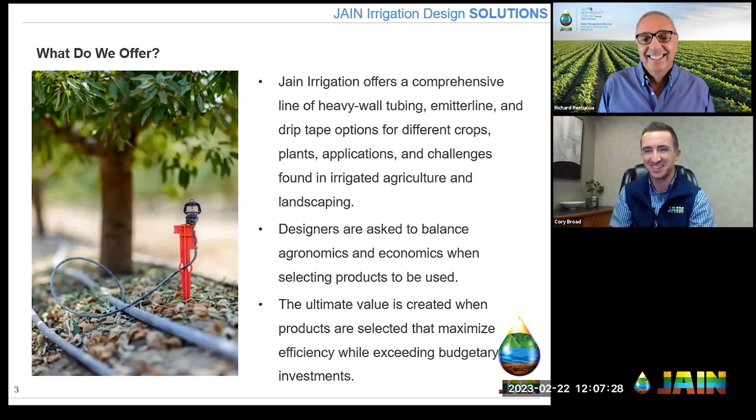And then there's an exponent, and then another variable, and then a fraction, and it gets really complicated. But no, you are certainly spot on, and not the only one.

And so, kind of to what I was just saying, this is just a screenshot I pulled from the catalog. This is just our heavy wall tubing section in our catalog. Again, I talked about having this robust, comprehensive line of irrigation tubing, or what we would call supply tubing. There's a lot of different things to unpack here. And it could be overwhelming if you're not sure what you're looking at, or what might be the best fit for what you're trying to do. We don't need to focus too much on the details of it, but I just wanted to put it out there that, hey, this is what we have to face every day. So you have a lot of different choices here.

Obviously in agriculture, we have most of what we do down to really 3 common sizes, which are nominally referred to as 1/2 inch, 5/8, and 3/4. But if you're on the technical side of it, it's 620 by 710, 720 by 820, and 830 by 940. There are going to be smaller and larger versions outside of those specs, but it really comes down to, for example, if you're using a pressure compensating emission device, say a Click Tif button dripper, you might be able to use smaller supply tubing, smaller lateral tubing, in order to save money, because that device is putting out the same amount of water across a wide pressure range. And we'll talk about that more in a moment.

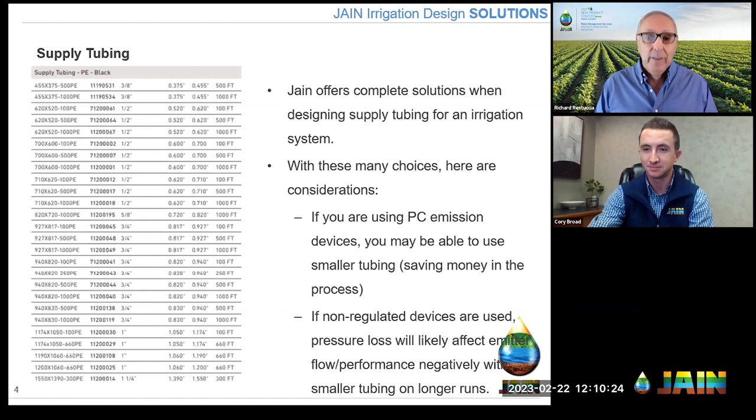Absolutely. And so just to break down what we were just talking about graphically, I've taken this from a number of presentations in the past, and what we're illustrating here is uniformity versus pressure. So if you had a non-regulated device, say a Jain Jet, or even a non-regulated dripper, you see on the left-hand side the pipe segment, and then it feeds down the row to the right-hand side. And in this example, all the way down the lateral, it's basically 16 pounds of pressure.

Therefore, you have that nice uniform blue box of water, if you will. Every plant is well watered, it's pretty easy to manage, and we know how deep it's going to go. Everything's good. Now, in an example where you had what we would define as excessive pressure loss, you started with 16, and instead of ending with 16, you're now ending with 6.5, so roughly 10 pounds of pressure loss. You see that the front plants are pretty well irrigated to about a third of the way.

Then those plants in the middle are kind of like, I'm not totally happy. And then probably the last few plants are not looking too hot, right? And it doesn't matter if it's a rose bush or an almond tree, they're not getting what they need. Especially from the ag side where we do fertigation, they're not getting the nutrients they need. It's an exponential compounding effect.

That's just an illustration of what happens when you have too much pressure loss in a line. That could be because we used too small of a tubing to meet the flow demand, or we just ran the tubing too far and didn't have manageable run lengths. And the example I got handed yesterday was, hey, I need your expertise, I have a question. And I said, okay. They said, I have a grower that has 8-gallon-an-hour sprinklers, spaced at, say, 15 feet apart, and they want to know how far they can run that.

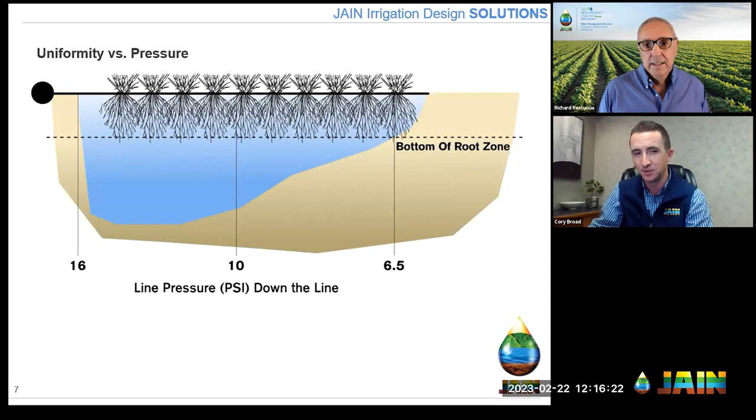And so that, again, is just a gross example of, well, now I have to over irrigate. Well, then that might throw off the nutrient balance on the front end of the orchard. And so there's just all of these things that go into play. So let's try and get to the first example where everything's really even and really nice. And again, work with the right products out of the gate.

So getting into a real life example, things that I see out in the field. This is a flow chart from one of our JainJet catalogs. And so I chose a number 35 orange nozzle, pretty standard spec that we see even in almonds, but also in citrus. And in this case, I chose citrus. It's a 20-foot row spacing with an 18-foot tree spacing. And our lateral run is going to be 330 foot long. So from the riser to the terminal end of the hose will be 330 feet, which is pretty standard for us commercially here.

If I say that I have a nominal spec of 20 PSI at the riser, and I go and I run that 330 feet with one jet at 8 gallons an hour, or 8.4 in this case, every 18 feet, so one per tree, again, very standard to what we do. If I use a 720 by 820 tubing, so a 0.720 inches inside diameter, I'll lose about 1.7 PSI down that run. If I go down to the next size smaller, which for Jain's offering is a 620 inside diameter, so I just shrunk it a little bit more, I'm going to essentially double that. It's 3.6 PSI of loss.

Both of those are probably acceptable, but let's work through the scenario together. Just on a numerical basis, in the 720 tubing, we're going to lose about 8.5% of our nominal spec PSI. We lost 8.5% of 20 PSI in that run. It's 18% when you use 620 tubing.

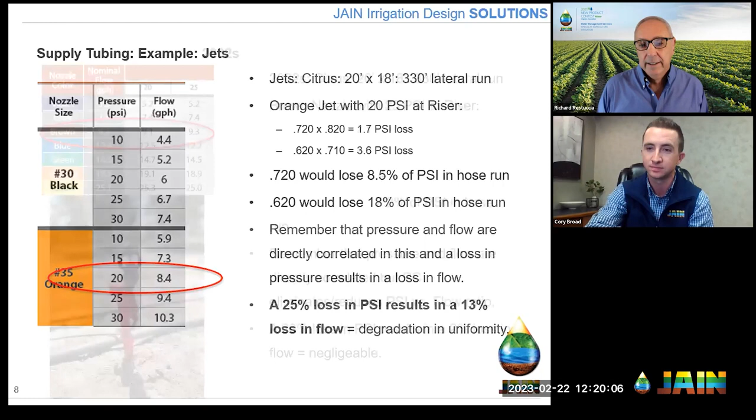Yeah, and then the other interesting point about this is that maybe it takes you a little extra time at the beginning to figure this out, or an extra phone call to you to figure it out, but it impacts every irrigation for the season. Absolutely. And the next one and the next season. We're talking about tubing that we want to see last 15 to 20 years. Yeah. We're talking about a crop that we want to see last 20 to 40 years, depending on what you're planting. So yeah, a little bit of detail up front can go a long ways. Yeah. Or I'm definitely making that phone call to you.

Exactly. So trying to draw some similarities and just showing a pressure compensating difference. So this is a 2002 micro sprinkler from Jain Irrigation. And I chose a flow that was somewhat close. This is 9.3 gallons an hour. So it's technically a little bit more. But let's just use that same scenario to show the difference there. These sprinklers run at a tad bit more pressure, but the 9.3 gallon an hour spec is at 25 PSI.

So if we use the 720 tubing, we lose 2 pounds of pressure. And if we use the 620 tubing, we're going to, again, about double that to 4.3 PSI. So using a larger tubing, it's 8% of our nominal hose spec at 25. If we go to 620 tubing, save a little bit of money, that's 17% of our PSI in the hose run. Now remember that pressure and flow are directly correlated, but PC eliminates or reduces the PSI to flow ratio. And so in this example, a 20% loss in PSI going from 25 to 20 results in a 2% loss in flow, which in my mind is negligible.

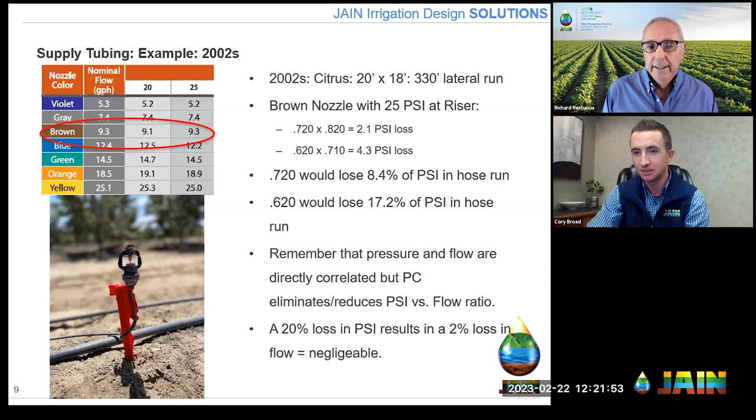There's more errors in irrigation scheduling and maintenance and all the other inefficiencies in working in outdoor large scale agriculture, that the 2% is really kind of minute, because the flow rate only changes from 9.3 gallons an hour to 9.1. That is the power of using a pressure compensating low exponent emitter device. Okay, so you said PC earlier, but that is the difference here. It's the pressure compensation. Absolutely. So we can still lose 5 pounds and get a 2% loss in flow versus 13. Yeah. So again, think of that in percentages too, and it's significant, huge.

Absolutely. So we've covered supply tubing, right? Again, this is tubing that doesn't have any emission device built into it. It's so that we can connect it to emission devices like those sprinklers we talked about. Maybe put our barbed adapters or put a button dripper like our click tif on there. It is supplying water to an emission device. When we talk about emitter line, because people will talk about drip tubing also, which is probably what people are mostly referring to, the technical term for emitter line is supply tubing with an emitter built into it.

It has an emitter welded inside of it. And for us at Jain, that's Amnon or Top Drip, and those are both pressure compensating emitters. And what's really neat about this also is that it comes in a wide range of sizes. So we tend to talk about it in millimeters, kind of in general terms, so 16 all the way up to 22. But also it's important to know the inside diameter and the outside diameter of those.

And one thing that's really unique to Jain is you take, for instance, the 17 millimeter option with the 570 inside diameter. We actually developed a fitting, because we sell fittings into the market and are one of the leaders in that space, so we have a coupler specially designed for that size hose. Very few other people can say that they have that specific size, but also the fittings to go along with it. And so I think that's an important differentiator, that we have all of these options and we have all the fittings and accessories to fit those options. Because I could come up with a really good idea, but if I have no way to put it all together, it really won't matter.

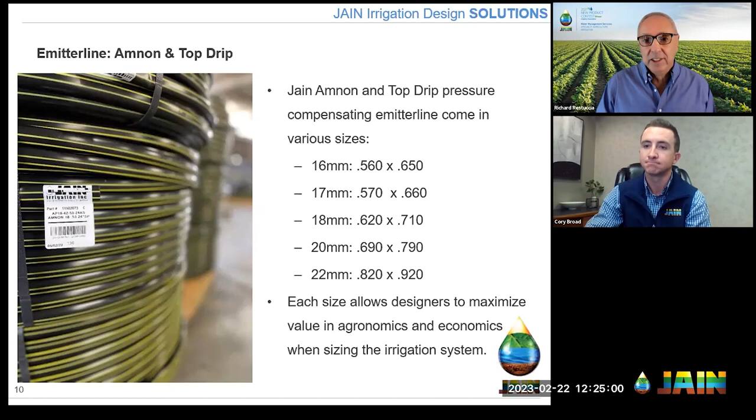So that's why I always encourage people to look at these products and have this in the back pocket of designers, because it allows them a lot of flexibility where they're not handcuffed to maybe one or two sizes, and then, well, I'm sorry, I have to add another line kind of scenario. Yeah, so I'm getting it. I'm starting to appreciate choice. Yeah, exactly. Guided choice.

So going down again with Amnon and Top Drip, they're PC, so really designers can limit capital costs without sacrificing that agronomic benefit. So hopefully you're still getting that same output of water that we talked about, because it's reducing the effects of pressure loss to a certain extent. But again, maybe I can lay out a field differently that becomes more user-friendly, or can limit cost up front for the grower. Those longer hose runs can be achieved using those larger diameter tubings that we talked about.

And then that allows you to run more tubing, which was going to exist anyways, the lateral length. But now maybe I'm cutting out trenching and PVC manifolds and riser connections and fittings and installation time, because it's kind of a net even on installing the tubing anyways, because it had to be out there. So these are just the things that irrigation companies get the opportunity to look at. And then hopefully that can trickle down to the grower as a more cost-effective system, and something that has a quicker ROI.

It is important to note, and we'll go into this, larger diameter hoses still require proper design though, to make sure that you have minimum operating PSI at the end of the laterals. Just because you made a choice to go, oh, I'm just going to go really, really big and I shouldn't have a problem, there still needs to be some of those formulas that you referenced earlier.

Yeah. So Cory, we have our first question coming in from a viewer, and I think it's a good one, and it's one I've heard before. And the question is about this: sometimes my local supplier has your fittings, but not your tubing, or vice versa.

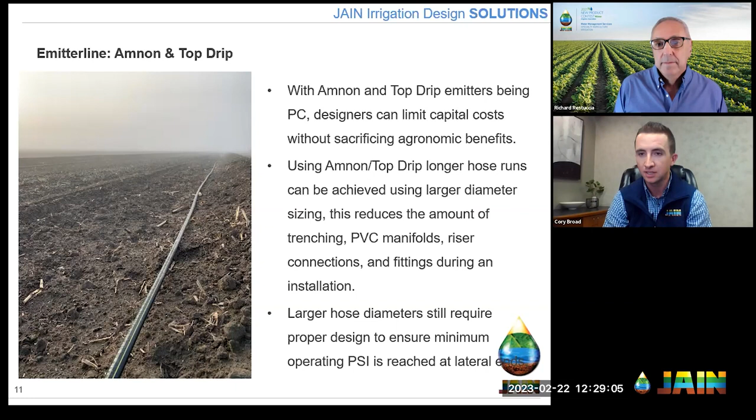And so I'm very confident in saying that, yeah, if they are an authorized distributor of our product, we would love to talk to them. Yeah. Okay, great. Thank you.

Absolutely. So I talked about making sure that it still has pressure at the end of the line. This is an example where somebody said, hey, we're having issues with the product out in the field. I'm like, what's going on? They said, there's no water coming out. And I said, well, that's unfortunate, because that's what we would hope that it would do. So I went out there and I said, hey, do you have a pressure gauge? And they said, yeah. And I said, why don't you put it on the end of the hose? And that's the pressure that we had at the end of the line. So therefore there is no flow.

So we talked about those longer lateral runs, but to a certain extent, you can only go so far physically without having some ridiculous pressure requirement. And so those longer lateral runs are great, but you're probably going to have an increased pressure demand also. If that pressure requirement is raised to operate the system regularly, say we needed to add another 10 pounds of pressure to this irrigation system, that just makes the operating cost that much more expensive.

It makes your vehicle, quote, less fuel efficient, right? I'm having to use more energy, which in most of our cases is electricity, in order to achieve this desired effect. And so upfront, it might be cheaper, but if I give you a 20-year cost of ownership and I say, Richard, this is $10,000 cheaper, but in 20 years, it's going to cost you $20,000 more. Time value of money, you can work that one out pretty quick, and your decision might change. A rule of thumb is, again, 1 PSI is about $2 per acre per year.

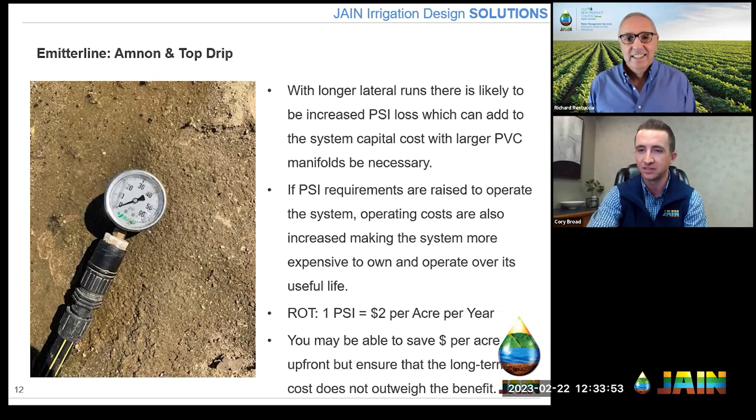Yeah, that's a great point. And you just solved a lot of problems for people. Hope so. But the big variability in this is how steep the hills are. Absolutely. And that's where I go to that experience and that certified individual to be able to look at it and say, okay, this is how far I can run this, but also here are the challenges I'm going to come to. Fortunately, Fresno's pretty flat, so it makes things pretty easy around here, but that's not the case in many areas that are irrigated. Right. And you mentioned the vineyards. What comes to mind right away?

Exactly. So I talked about resources earlier and the length of run calculator. I have the link up here. It's pretty easy to find on our website under resources. It's a free online resource. Anybody can use it, and it's really good for emitter line and tape lateral sizing.

So in this particular instance, I chose an emitter line in this example. All I did was enter 20 pounds of pressure at the inlet side and then clicked calculate. There's a few other things you could include if you wanted to, but essentially here you can see I start with 20 and then you can see my ending pressure, and it's calculated in 100-foot segments. So there's basically no pressure loss in 100 feet. At 200 feet, less than a pound.

You could see the curve starts to change though, because you go from 19 to 18 to 16, and so forth. This is your ending pressure. So in this case, you might have just about 4 pounds of loss. This one all of a sudden becomes significantly more, and it's kind of a hockey stick curve.

So you can kind of sit there and go, at your property, hey, I wanted to run this 500 feet. Oh, okay, 4 pounds of pressure. I know I could supply 20 pounds, then we're good. If you said, I want to run it 800 feet, well, now all of a sudden, I talked about that minimum operating pressure. I'm outside the curve now. I'm at 5 PSI at the end of that line.

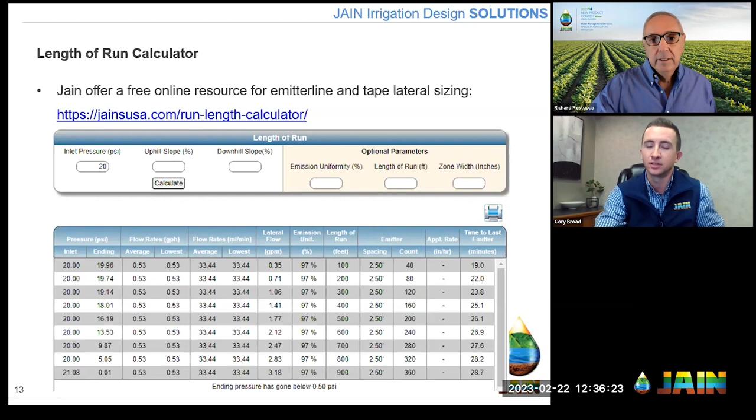Yeah, so you do have three options, but really in a lot of cases, the least expensive option is going to be to increase the size of your tubing. Right. Because it may be more expensive upfront, but in the long run, you're going to go, wow, that was a much better choice. Right. And Cory, a lot of people think they're saving money by downsizing their tubing. What do you have to say to them?

You certainly can. I think it's also situational, that you have to work with somebody as a trusted advisor to say, the difference between one size of tubing to the next might be just say $15 a roll. Well, if I have a double line drip system in almonds, that's about 4 rolls per acre, $15 per roll difference, $60 an acre.

Well, when you have $10,000 an acre removing vines, replanting trees, putting in an irrigation system and doing all this stuff, $60 doesn't seem like much, but you've just spent a lot also. So you're a little sensitive maybe. And you sit there and go, okay, well, I don't really know if I need that.

But then I say, Richard, you need to have more piping if we go with smaller tubing. I can't cross the field once, I have to cross it twice. And you go, okay. And I said, well, that's twice as much trenching for me, and it's twice as many risers. And then also when you go to flush it, there's twice as many hose ends.

And so again, it's about working through that balance with somebody that has that experience to say, here's the pros and cons to each of these decisions. And my job is to maximize the value for you as a grower. Yeah, that's great. That really helps, stepping through that thought process.

Thank you. Absolutely. So getting into the drip tape portion, which I would say is perhaps the most sensitive product to size. Jain still offers a really comprehensive line of drip tape sizes, emitter styles, and tube builds. Again, we have our Chapin, our Cascade, and our Turbo Tape models, if you will. Those are our three distinct lines, and they're all super unique in their flow path and emitter styles.

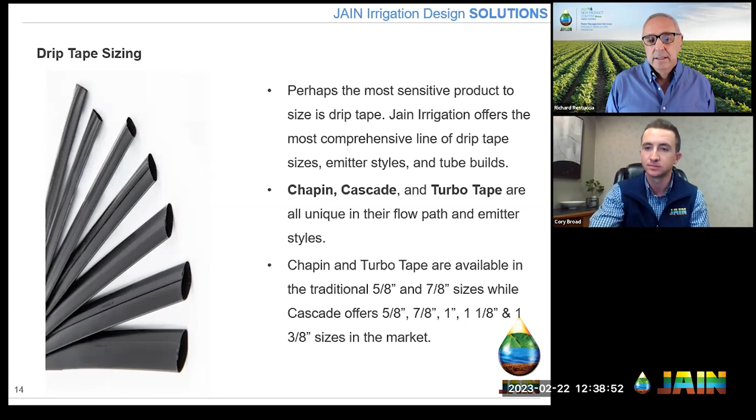So if I'm getting this right today, if I'm thinking about really long runs, I'll probably be thinking Cascade. Generally, yes. Because again, I have the option of changing the flow of the emitter, moving the spacing of the emitter, or changing the size of the tubing.

Yeah. And so Cascade predominantly gets sold in the Midwest portion of the country, where they do half-mile runs, because of the way that their infrastructure and layout is, where here we're doing a lot of quarter-mile runs that will use a lot of 7/8 tape. So it just depends on kind of what the fit of the land is.

I talk about it being the most sensitive to size due to longer lateral runs. So where most of our orchards are 330 to 660 foot supply tubing and emitter line runs, most of our drip tape applications here, especially in the Central Valley, are a quarter mile or roughly 1,300 feet, so almost double. And most drip tape flow rates are specified at 10 psi of operating pressure, with emitter line running generally around 15 to 20, and then sprinklers kind of in the 20 to 30 range.

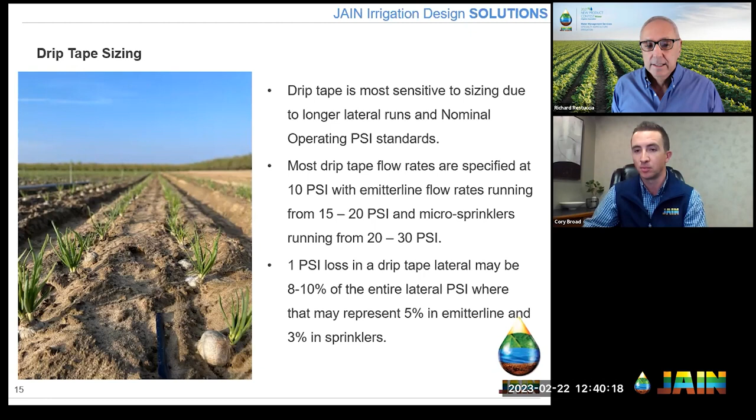And so if we again break this down numerically, 1 psi loss in drip tape could be 8 to 10% of your nominal flow rate, whereas that same 1 psi might be 5% in emitter line or 3% in sprinklers. So getting it right in drip tape is super important because the tolerances are so much tighter.

And with that, drip tape is almost exclusively non-PC due to cost and style of the products. It's really hard to weld a PC emitter in a very, very thin wall product. Therefore, there are some PC drip tape options, but it might be available in a 25 mil thick product instead of a 6 mil product. Well, if I'm growing corn and I'm only keeping it in the field for 1 year, I don't want to buy a 25 mil thick product. Economically, I can just never make that work.

So that lack of PC really requires strict design procedures to make sure that water is uniform across the field and manifold in the block. Sizing drip tape is important, but selecting the mil thickness is important. So I just talked about a use case example of a single use seasonal tape being 5 mil or 6 mil, and then a longer term tape being all the way up to a 25 mil option. Most of what we use here in the Central Valley is going to be anywhere from a 5 mil to a 15 mil. There's very few use cases of this really heavy stuff.

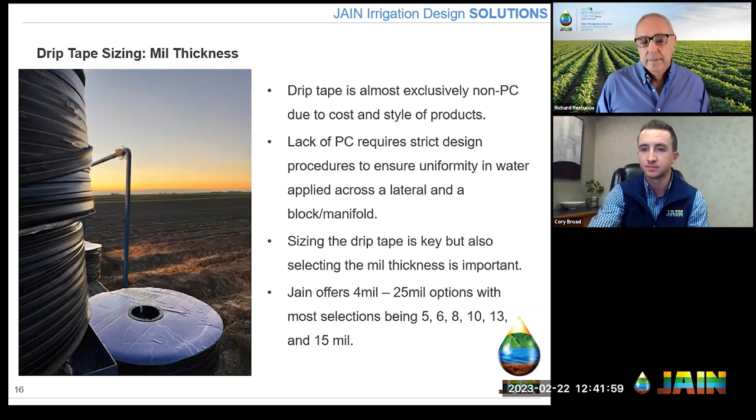And there's some on the very thin side, but thinking about it going into corn, cotton, tomatoes, celery, lettuce, you name it, all these field crops, they're only in the ground for sometimes 88 days, sometimes just 2/3 of the year. Whereas if I go and I put a hose out in an orchard, it's going to be there for 20 years. It needs some flexibility, and it can't be super thick, because the thicker the product, the more expensive it is. Yeah, that's interesting, right? Because like you said, on the high side, it's not even a 1/2 inch. Exactly. And so it's very important to get this right.

And I really think about the mil thickness, not just on the durability of the product, but also how you can maintain it. You know that I've done a number of these series on maintenance, because it's something that I'm passionate about. But if you work through this if-then statement with me, if you're going to have a longer lateral run, you need to have a larger diameter size. The tubing or tape has to be larger.

Well, now you have a longer lateral run, you're going to have a larger pressure requirement to flush, to make sure that water is coming out the end at proper velocity. So we have a larger run, we have a bigger tube, but now we need to have more pressure in order to evacuate all the debris at the minimum velocity. That larger PSI requirement means that the product has to be thicker in order to handle it so it doesn't burst.

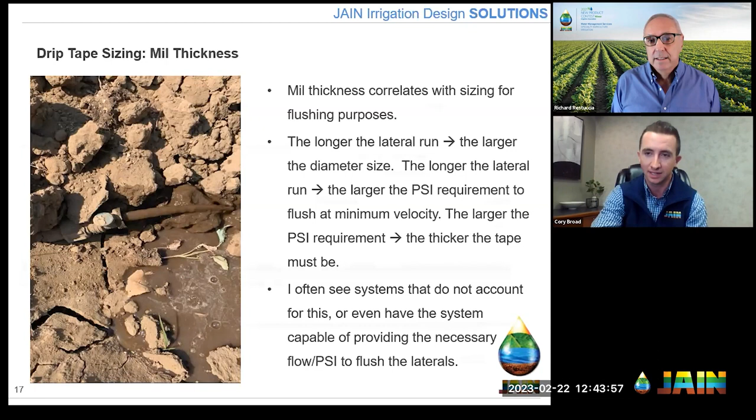And so when a grower says, yeah, I flushed my field last week, well, that's what you end up getting is chocolate milk out of the end, because it just didn't do anything to remove that debris. And I've gone through that in some other presentations. But I do see a lot of systems that don't account for that flushing requirement, and quite frankly, don't even have the pressure and flow capable of providing an adequate flush. And that, again, can kind of go back into some of my other presentations.

So I showed the length of run calculator earlier. This is kind of the full screen that you would see on our website. And down at the bottom, there's a flushing tab. So you can see I selected 1.5 feet per second velocity. We only give you 2 options, which is 1.5 and 2, because those are kind of industry standards. But I'm using a Cascade 7/8 tape diameter, 14-inch emitter spacing with a 0.17 gallon an hour. I'm running at that kind of 1/4 mile we talked about at 1,280 feet.

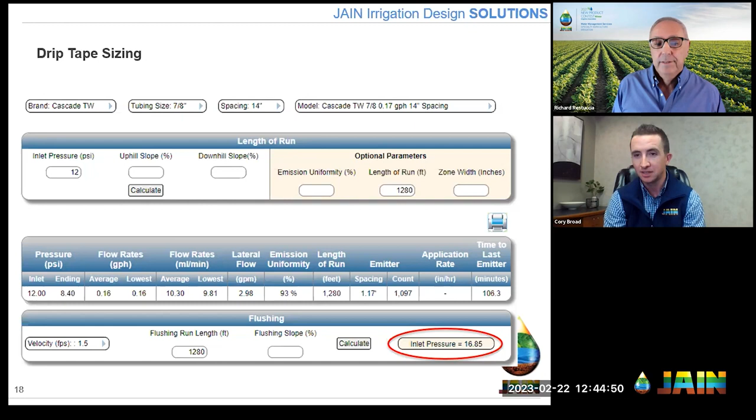And you can see that, normal operating, I lose about 4 pounds of pressure. It's 93% uniform. Tells me my average flow rates, gives me a lot of information, but tells me, yep, you're pretty much good to go. But if I go and I plug in 1.5 feet per second on this, I need almost 17 pounds of pressure at the beginning of the line in order to get my correct velocity at the end. So you sit there and you go, well, why is that important?

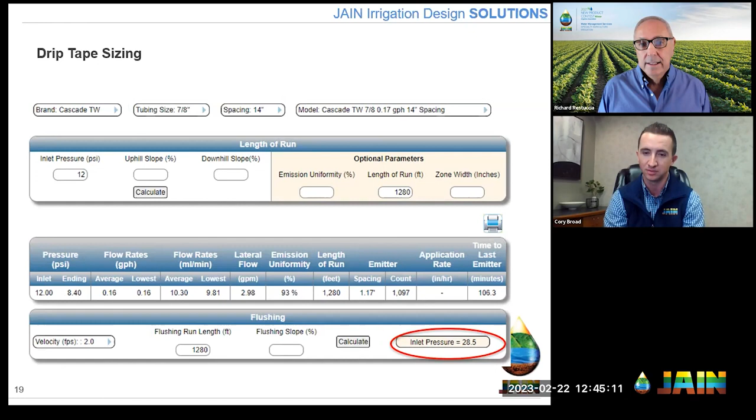If I change it to 2 feet per second velocity, it's now 28.5 pounds of pressure in order to adequately flush that line. So if I have excessive amounts of debris and I need that extra velocity to move it, I need the product to be able to handle 28.5 pounds of pressure. Here is a screenshot again out of our catalog. All of this stuff is publicly available. And you look at, we were talking about a 7/8 inch tape earlier. You can see over here, max operating pressure, but also max flushing pressure. I talked about 28.5 pounds.

Well, 13 mil is actually going to be the product that I would need to specify in this case. If I wanted to use a 7/8 6 mil product, I could probably use it just fine. I just may not be able to flush at that higher rate, which may or may not be an issue. I talked about 6 mil only being in the ground for days to a few months. So maybe it's something where if it degrades at a slow rate and I just flush it kind of at the minimum and I get by, I'm pulling it out anyways.

But if I go and I bury something in the ground for 3, 4, 5 years, I need to make sure that it's a thicker product, not just for that durability, but for the ability to be able to say, wow, Richard, we got into some bad water and I really need to get this debris out. And I know that my product can handle that without bursting. So those are the considerations.

And where I see the mistake get made often is growers might get into that 10 mil product where they say, well, it's 2 to 3 year product, I'm just going to go 10 mil. Well, you might actually want to consider just jumping up to 13. It's going to be a stronger product when you go to install it. It's going to be a stronger product when you go to remove it, but also you can guarantee that you're going to be able to flush it at the right velocity.

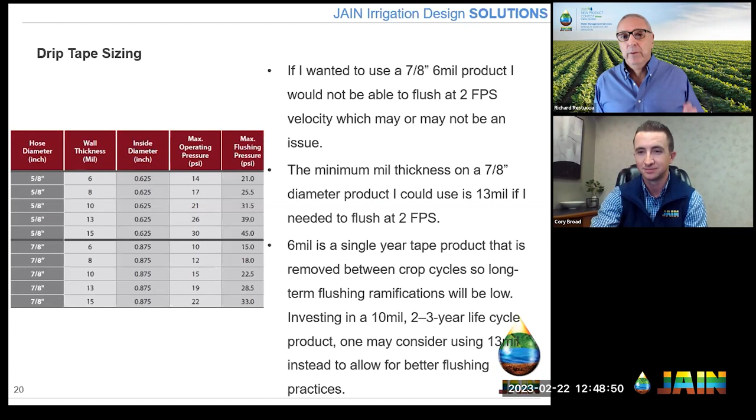Yeah. So the air vents, one of our most popular trainings, maybe surprising to some that it was so popular, but the right vent and the right placement is key. And you did a really good job getting those points across.

I appreciate that. And if I kind of wrap it up as I do in most of my talks with a summary: larger tubing can allow for longer lateral runs, potentially decreasing overall infrastructure costs. PC emission devices can be used to decrease the tubing size, like we talked about, which can save capital investment on the front end. Jain, Amnon, and Top Drip are pressure compensating and have that large PSI operating range I talked about earlier, allowing for maximum capital cost savings.

And then drip tape is most sensitive to PSI changes due to low operating pressure conditions compared to those emitter line and sprinkler examples that I've shown. So there's a lot of flexibility in the products we offer, very robust catalog offering. But again, we have really qualified and experienced people on our staff to help you. And a number of our distributors obviously have those same people as well. So there's help out there. Just ask for it, ask the right questions. Obviously, if you came here, I think you're in the right place. So that's my summary.

Wow, Cory, thank you so much. What a great job you did, helping us all understand the differences in these products, and more importantly, showing us some resources to help us learn what the right product is for our application. And then offering up your services so people understand that they can call you, they can reach out to you whenever they want, and you're more than happy to help.